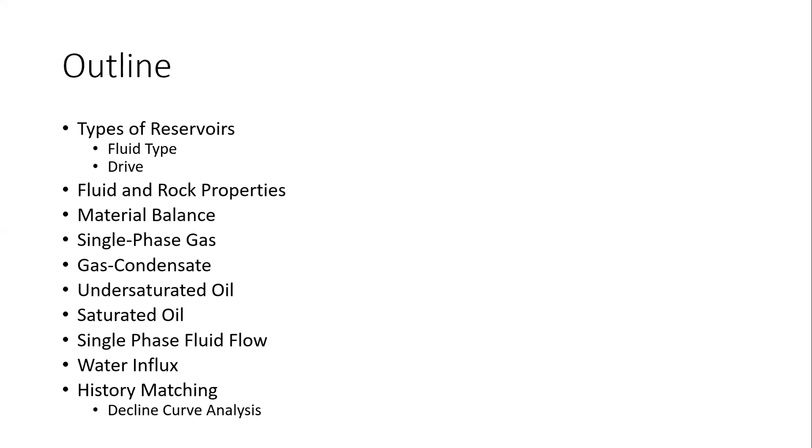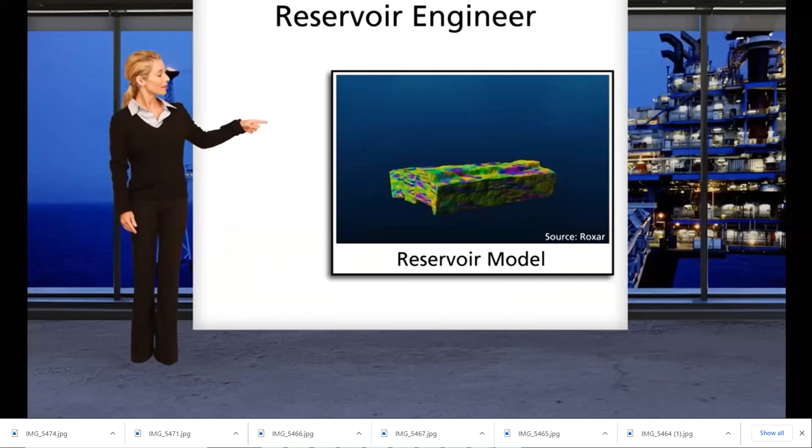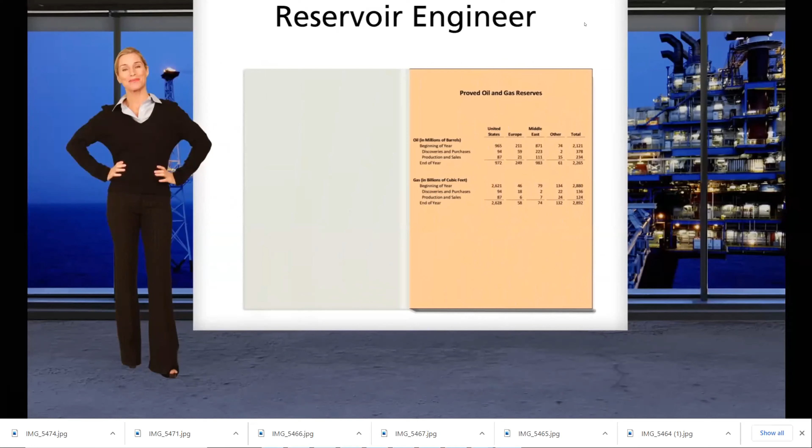These models allow us to perform simulations that help us determine how to manage a reservoir. There are many options involved in reservoir management, so we perform economic evaluations of options to help our company make the best decisions. Finally, we prepare periodic estimates of remaining recoverable reserves. These estimates are relied upon both inside our company and by outside investors, so it's important that we get them right. My job is to design and oversee the drilling... So that's a general introduction of what a reservoir engineer does. Was everyone able to hear that?

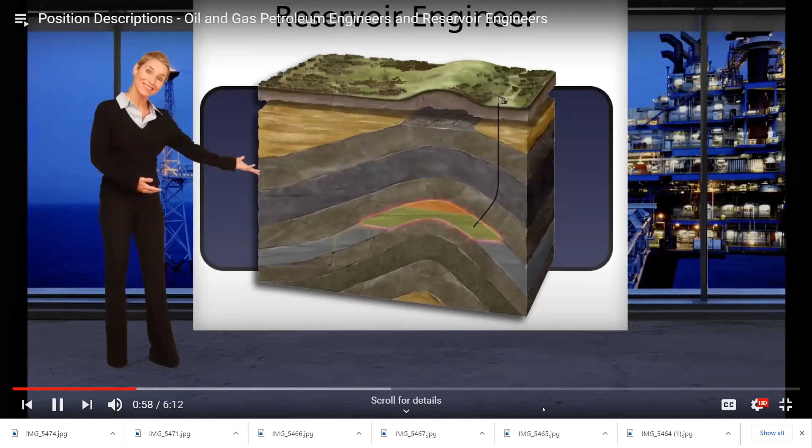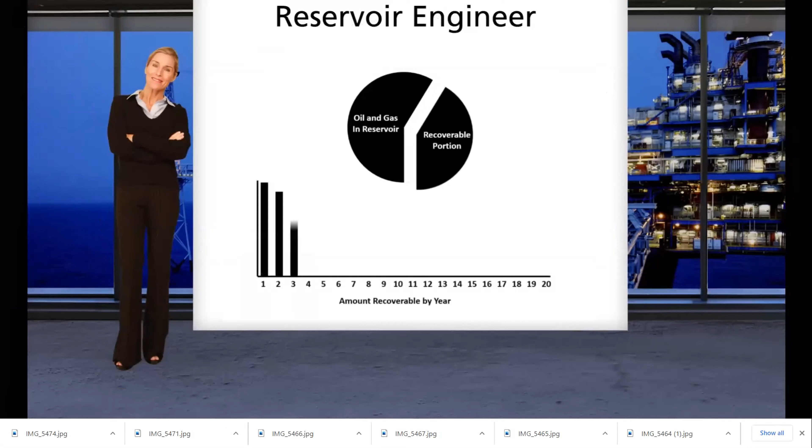A reservoir is underground oil and gas in the rock pores. Reservoir engineers help determine how much oil and gas is in a reservoir, how much can be recovered, and how quickly it can be produced. We also determine what types of wells should be drilled, how many are needed, and where they should be located.

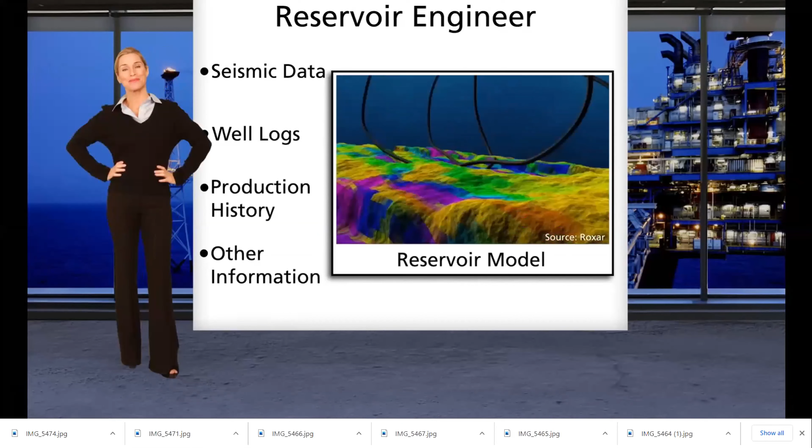We work with reservoir models built using seismic data, well logs, production history, and other information. These models allow us to perform simulations that help us determine how to manage a reservoir. There are many options involved in reservoir management, so we perform economic evaluations to help our company make the best decisions. Finally, we prepare periodic estimates of remaining recoverable reserves. These estimates are relied upon both inside our company and by outside investors, so it's important that we get them right. My job is to design and oversee the drilling of wells, so I'm called a drilling engineer.

Drilling can be extremely complicated. We have to drill holes.

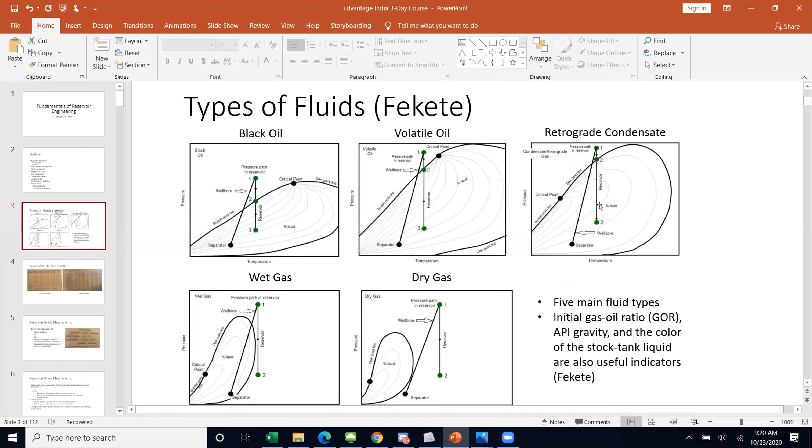First, I'll go over the types of fluids, as I mentioned before in reservoir engineering. There are 5 types of fluids: black oil, volatile oil, retrograde condensate, wet gas, and dry gas. You're able to figure out these different types of fluids from your initial gas oil ratio, API, and the color of the stock tank liquid.

So they're useful indicators. Now for the black oil, I'll go into the detail of what each type of fluid is.

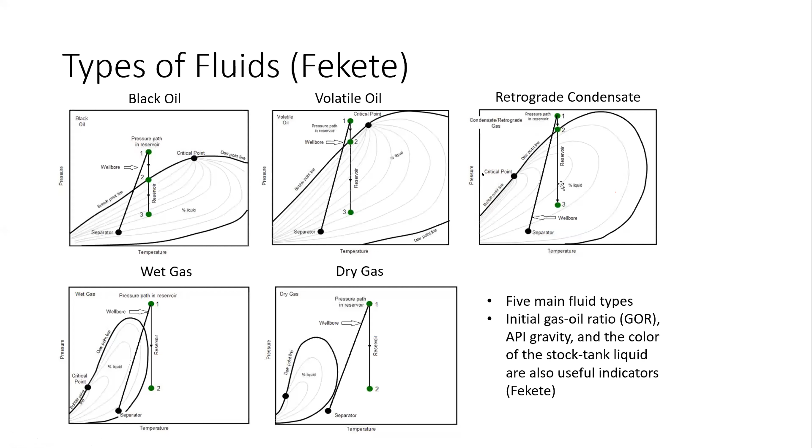Let's see, next slide. Here are a couple more slides that I've gotten from the Craft and Hawkins book, and then the Walsh and Lake book, the reservoir textbooks. I would suggest you get these textbooks to get more information or to give yourself more knowledge in reservoir engineering.

From the Craft and Hawkins textbook... okay, my screen stopped sharing. Let me share my screen again.

If you look at the stock tank gravity, as you go to the lighter fluids, you're getting higher gas oil ratios. And for the API stock tank gravity, you're getting higher API gravities as you reach along the different types of fluids. And then this gives you the different types of colors for each fluid type.

So for a black oil reservoir, you're getting a greenish black. For a volatile reservoir, you're looking at medium orange. A gas condensate reservoir is a light straw color, and for a dry gas reservoir, you're looking at water white. And same goes for wet gas.

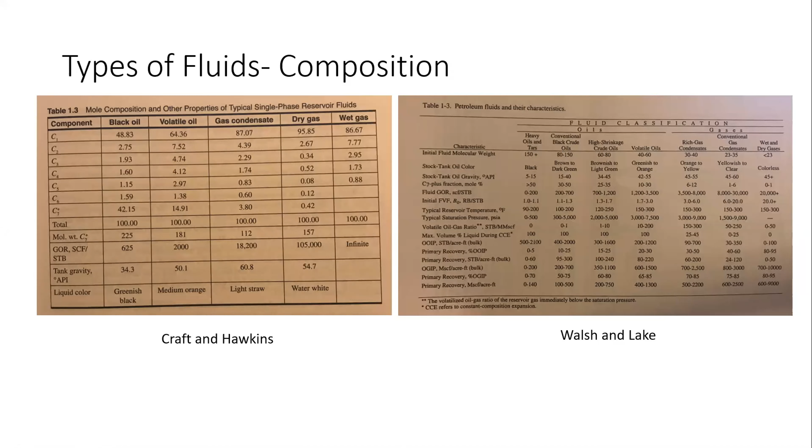Okay, next slide. Now I'll cover the reservoir drive mechanisms as a basic overview in engineering.

To give you the overview of drive mechanisms, you're looking at an energy compression of water and rock, oil and gas. Water is contiguous to and in communication with the reservoir, and gravitational energy causing oil and gas to segregate. This chart gives you an idea of how the drive mechanisms are separated. We're looking at 3 types of drive, such as expansion drive, water drive, and compaction drive.

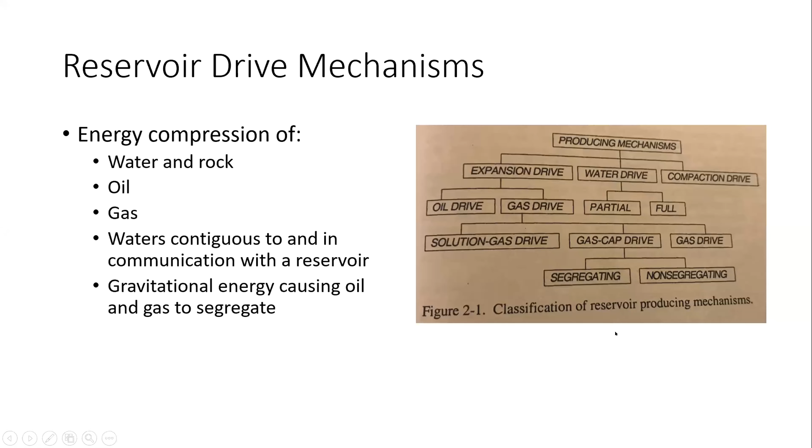Expansion drive is the expansion of reservoir fluid influencing reservoir production. So you have oil expansion and you have gas expansion. I talked about solution gas cap and general gas drive.

Solution gas is dissolved gas that influences reservoir production. You have gas cap drive, which is gas expansion from a gas cap, which influences reservoir production. And you have a general gas drive.

For water drive, you have partial water drive, which means an aquifer has poor water quality and will diminish. And for a full water drive, you have a stronger aquifer, and that influences reservoir production. For compaction drive, you have pore volume contraction that contributes to the reservoir production.

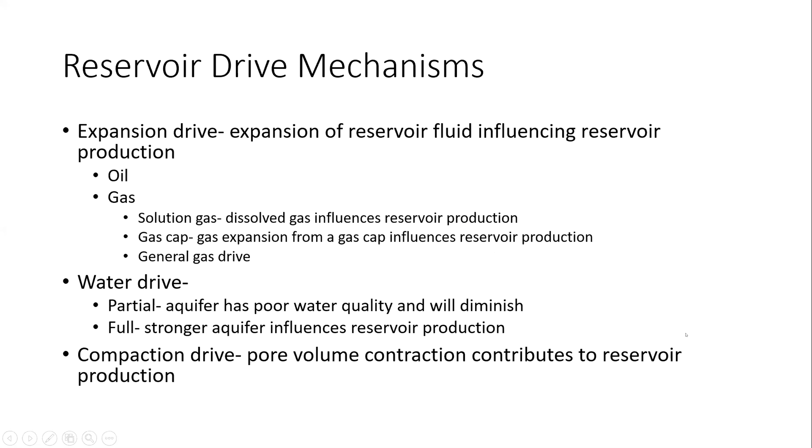For rock properties, I listed some equations down here that could be very important in reservoir engineering. For example, you're looking at porosity. Porosity is, the simple concept of porosity is really your pore volume divided by your bulk volume.

So think about a Swiss cheese cube and think about all the holes in the Swiss cheese. The holes in the Swiss cheese divided by the total volume of the Swiss cheese is going to be your porosity. Then you have isothermal compressibility.

Isothermal means the same temperature, and compressibility is your 1 over volume times the change in volume with respect to pressure. These are your relations of compressibility with respect to porosity. The first equation for your compressibility was developed for sandstones with porosities ranging from 2% to 23%. The second compressibility relation was developed for limestones with porosity ranges of 2% to 33%.

Then you have fluid saturations of oil, water, and gas, which are pretty important for your rock properties. Saturation is pretty much the percentage of fill-up within your porosity that constitutes a certain fluid. So for example, your oil saturation would be the porosity filled by oil divided by the total porosity.

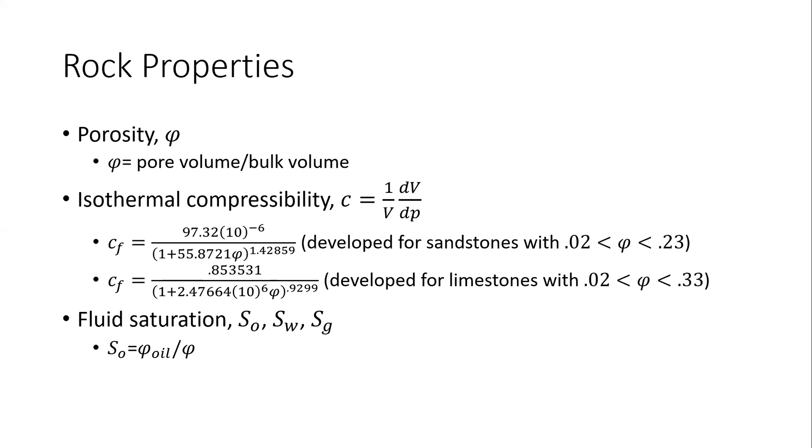For fluid properties of gas, you're looking at the ideal gas law. That is one concept that I would say is pretty important. It's PV equals nRT, where P is your pressure, V is your volume, N is the number of moles, R is a gas constant, and T is your absolute temperature.

You have specific gravity here, which means your density of gas divided by the density of air, which is your molecular weight divided by the molecular weight of air.

Then you have your real gas law, which is PV equals Z nRT, and Z is your compressibility factor for real gases. Z is defined as the actual volume of N moles of gas at a given temperature and pressure, divided by the ideal volume of N moles of gas at that temperature and pressure.

You have your gas formation volume factor, which is Z nRT over P. The formation volume factor is essentially the factor it takes to go from the reservoir to the surface to get your volumes at the surface.

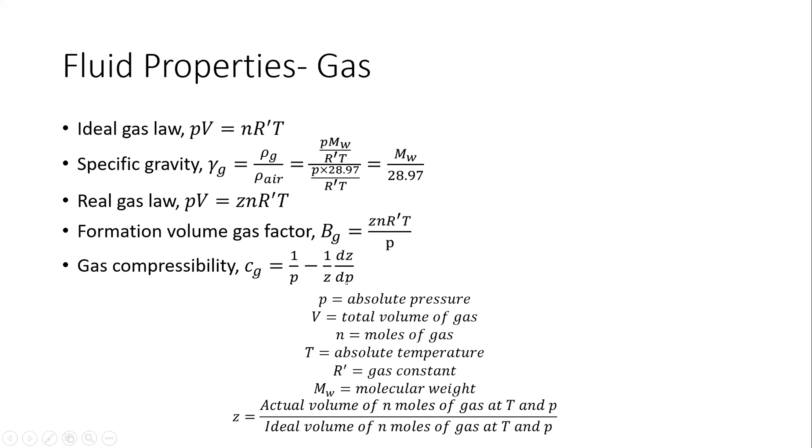And you have your gas compressibility, which is 1 over P minus 1 over your compressibility factor, with respect to the change in compressibility factor with respect to pressure.

So I wanted to give you a sample problem to help you figure out how to determine your Z factor. You're going to learn how to get your pseudo-critical pressures and your pseudo-reduced pressures and pseudo-reduced temperatures with respect to different types of gases.

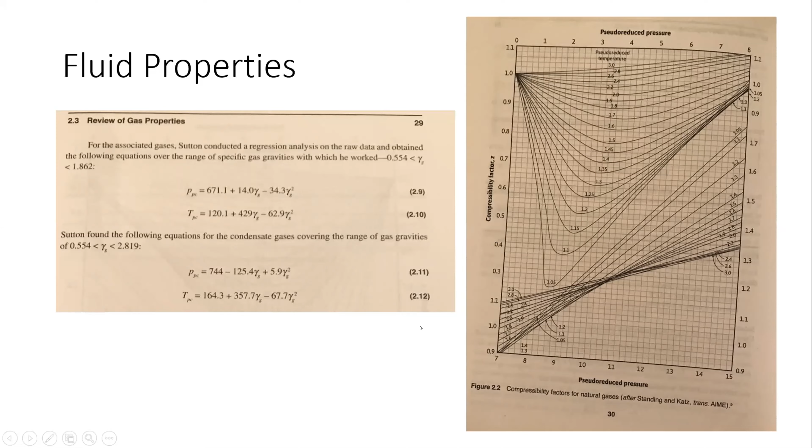Now I'll talk about the fluid properties of oil. You have your solution gas-oil ratio, which describes how much gas is in solution at the reservoir. Then you have your API gravity, which is another relation to the specific gravity of your oil, calculated as 141.5 divided by the specific gravity of oil, minus 131.5.

Then you have your formation volume factor of oil, BO. Above the bubble point pressure, the formation volume factor of oil equals the formation volume factor of oil at the bubble point, times e to the power of the oil compressibility times the difference between the bubble point pressure and the reservoir pressure of interest.

And then for pressure below the bubble point pressure, you have BO equal to the density of the oil at standard conditions, plus a relation that includes your solution gas-oil ratio times the specific gravity of gas at surface conditions, divided by the density of oil at the condition below the bubble point pressure.

You have oil compressibility here. Your compressibility of oil is 1 over volume with respect to the changes in volume from start to finish, and then the pressure differences from start to finish.

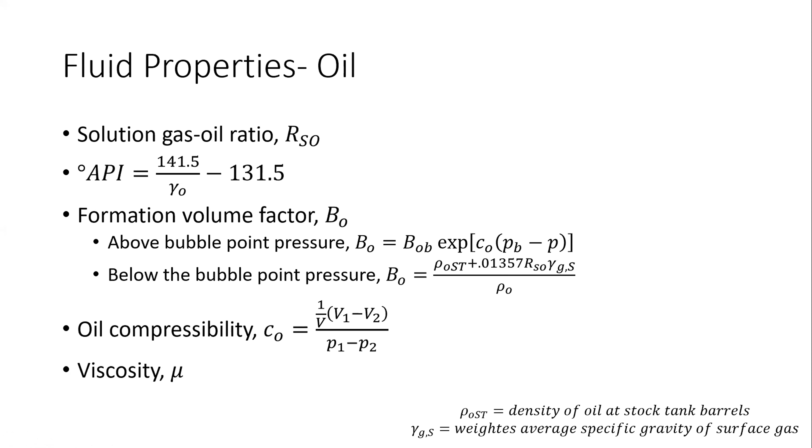Now I'll talk about the fluid properties of water. Water is a pretty simple fluid in how it's treated when it comes to reservoir engineering.

You have your formation volume factor of water, which is typically 1, but it can range from like 1.02 to 1.05. You have your solution gas water ratio, which holds true for predominantly water-producing reservoirs.

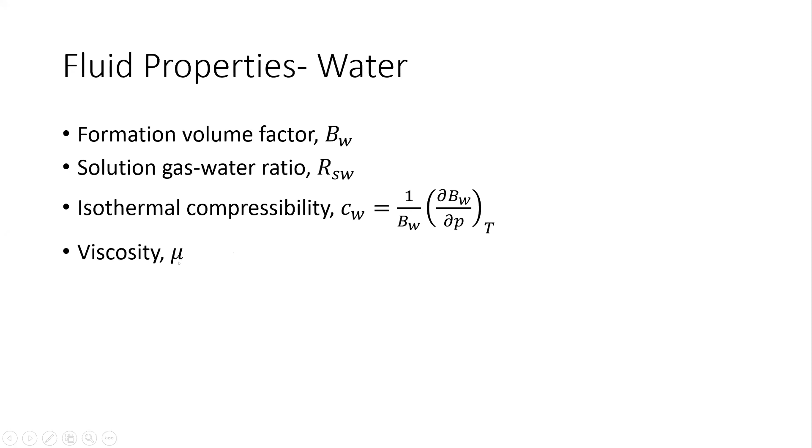Then you have your isothermal compressibility, which is 1 over your formation volume factor of water times the change in your formation volume factor of water with respect to pressure, at the same temperature. And then your viscosity of water, which is typically 1 centipoise.

This is the formulation of your material balance below. This is your oil expansion, and this is your gas expansion term. This is your formation water expansion term, and this is your water influx. And this is equal to your oil production, and this is equal to your water production.

If you're wondering what M is equal to: the total gas in place times your formation volume factor of gas, divided by your total oil in place times your formation volume factor of oil.

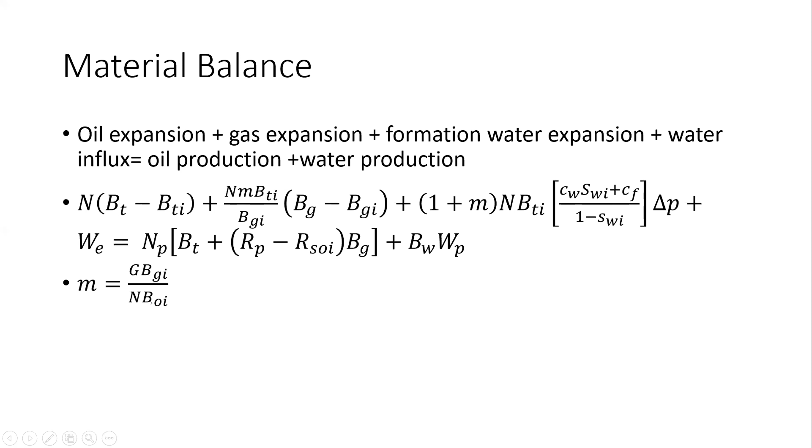Hello? Yes, ma'am, we have a doubt from one of the students, from Muru Vikra Marante, about viscosity measurements, converting mm squared per second to Cp to Pa dot S. Please share the unit conversion.

So are you talking about viscosity? Viscosity measurements, yeah. Yeah, it's Pascal times second, so Pa times S. Okay.

So here are some uses and limitations for material balance. For uses, you're determining the initial hydrocarbon in place, calculating your water influx, and predicting your reservoir pressures.

For limitations, you have precision of values that relies on the data available. As the pressure declines, there is supersaturation, underestimating the average reservoir pressures. It's assumed that PVT gas liberation closely duplicates the same process in the reservoir, well, and separators, and that can actually vary widely, causing error.

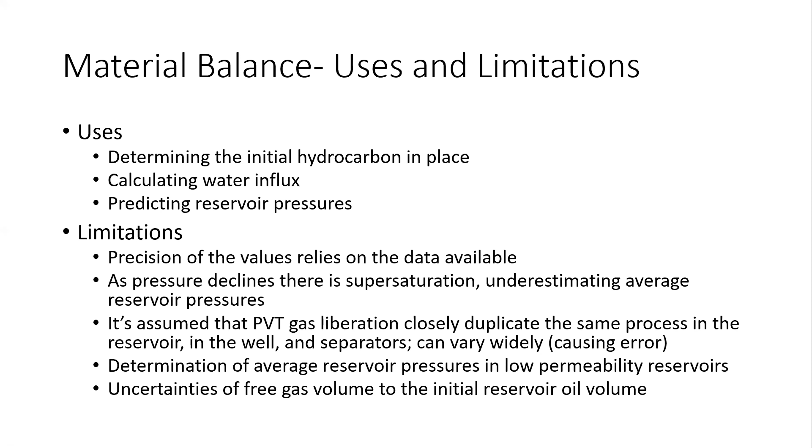The determination of average reservoir pressures in low permeability reservoirs, and uncertainties of free gas volume relative to the initial reservoir oil volume—those are going to be some of the limitations for material balance.

For single-phase gas, you're looking at some important terms such as your original gas in place, which uses acre-feet, or a conversion of acres to feet squared, times your porosity, times 1 minus your water saturation, divided by your formation volume factor of gas.

For the gas material balance, you're looking at your gas expansion plus your water influx is equal to your gas production plus your water production. Assuming no water encroachment or water production, the material balance can be simplified to the gas expansion equal to the gas produced.

This can also be rearranged and reduced to your P over Z, which is equal to your initial pressure divided by your initial gas compressibility factor, divided by your gas in place, times your gas produced, plus your initial pressure divided by your initial compressibility factor.

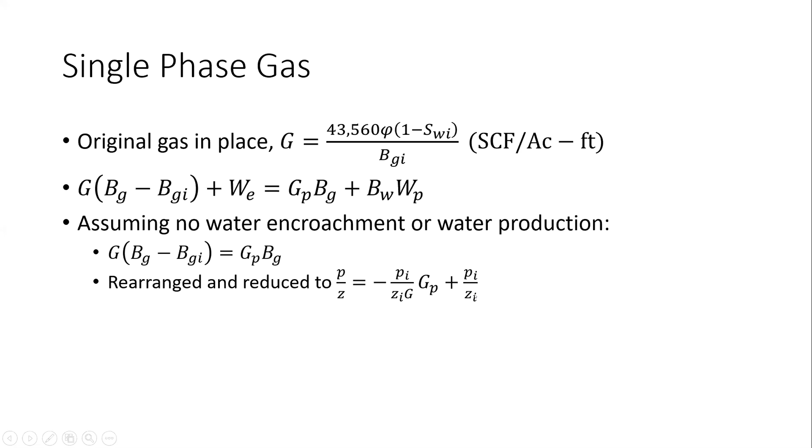Here's a chart that gives you your P over Z plot versus cumulative production. Reaching the end of the plot to get your x-intercept represents your initial gas in place.

If you have a water drive, you're going to be curving upward. If you have some water encroachment when it comes to your gas production, it can make it hard to predict your original gas in place, so material balance is very important there.

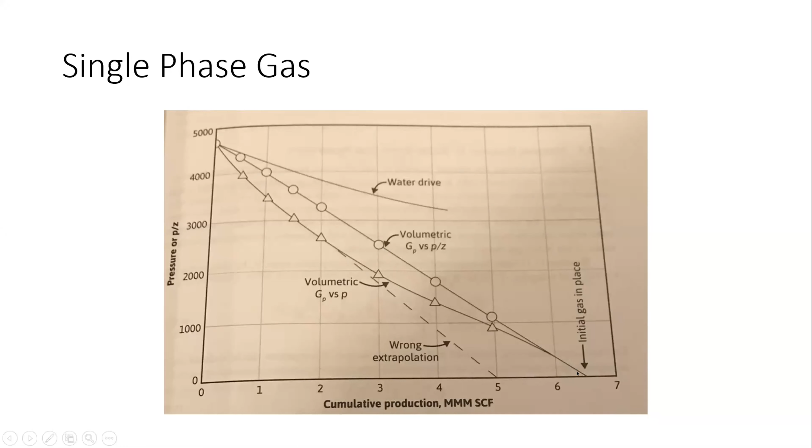And then you have your volumetric gas produced versus your P over Z. You could have some water encroachment to where your initial gas in place could be a little bit higher in that curve.

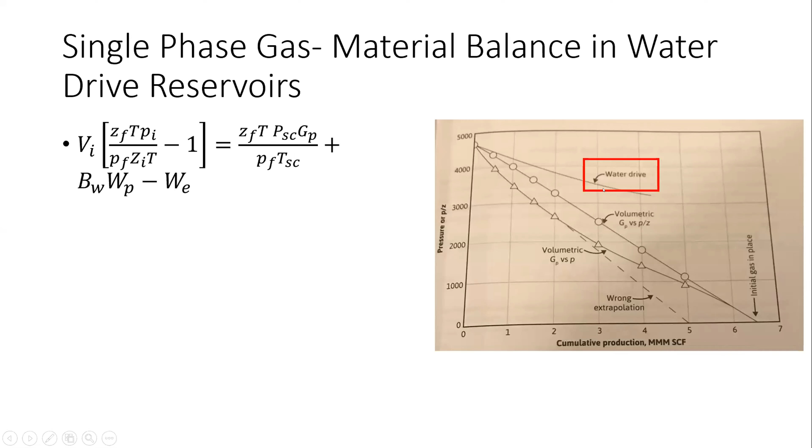Then you have your water, plus your water produced minus your water influx. And it's referring to this curve on this plot over here.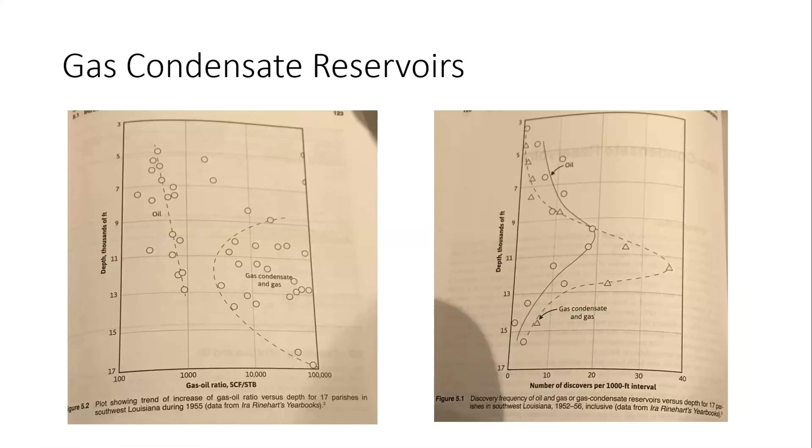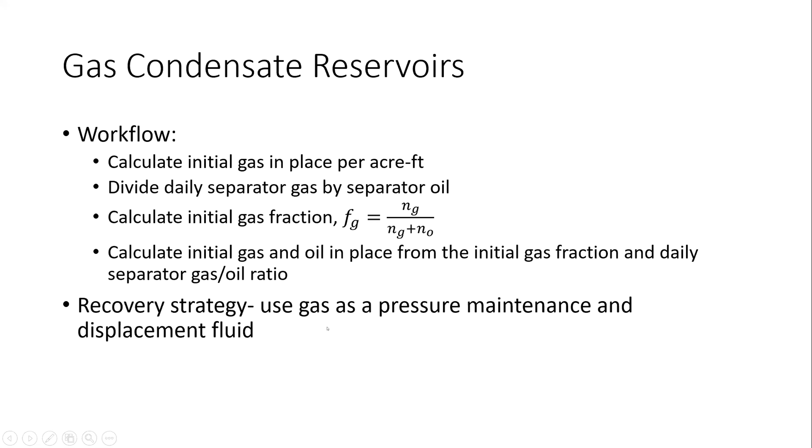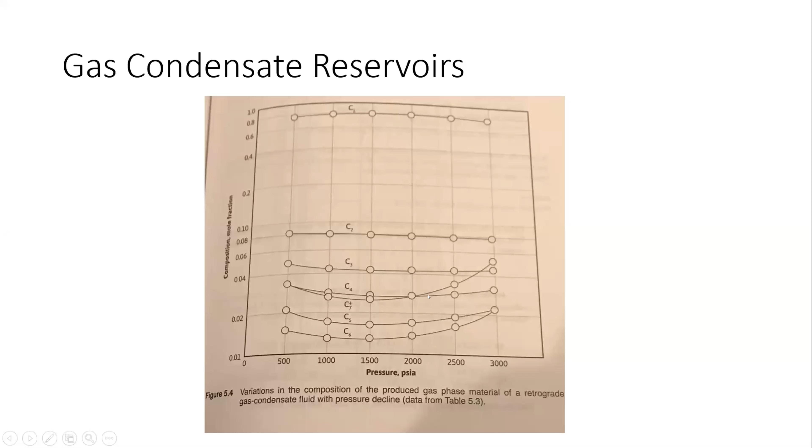Here's an overview of your gas condensate reservoir showing different elements at different pressures, with different values and different compositions at different pressures, which makes your gas condensate reservoir very sensitive to pressure. The heavier elements move a little bit upward as the pressure goes higher, while your lighter elements, C1s, C2s, and C3s — methane, ethane, and propane — stay relatively the same. But when you reach butane, pentane, hexane, and heptane plus, you see some curvature as pressure changes, making the heavier elements more sensitive.

So here are some best practices for volumetrics in gas condensate reservoirs. You duplicate reservoir depletion by lab studies on a representative sample of an initial single-phase reservoir fluid. You hold the sample at high pressure in the cell, at reservoir pressure and initial temperature. During depletion, the cell volume is held constant to duplicate a volumetric reservoir, and therefore you remove the gas phase hydrocarbon from the cell.

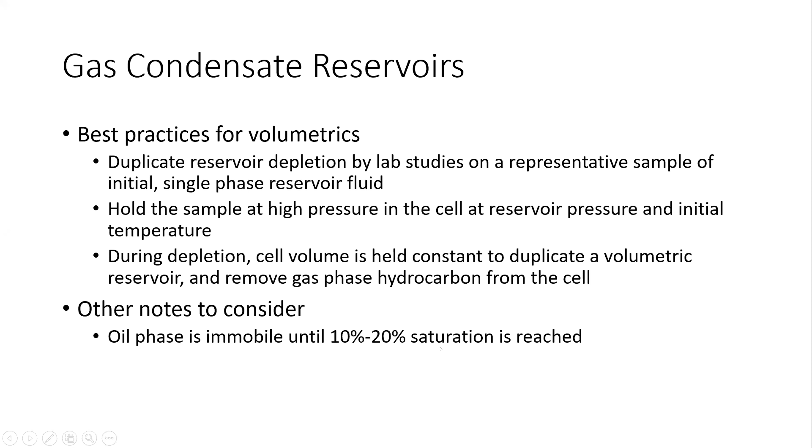Other notes to consider: the oil phase is immobile until 10 to 20% saturation is reached, so it's at higher pressures that you probably reach higher oil saturations.

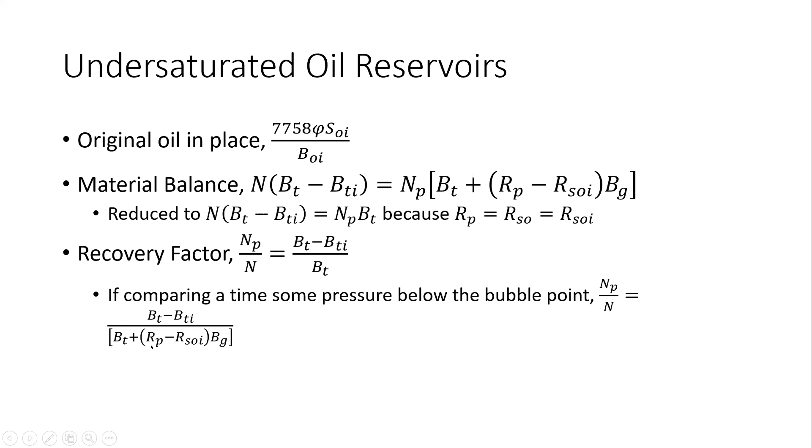If you're comparing at some time below the bubble point, this is the relation for the recovery factor. You have to include the solution gas oil ratio at a certain pressure because you have some pressure below the bubble point.

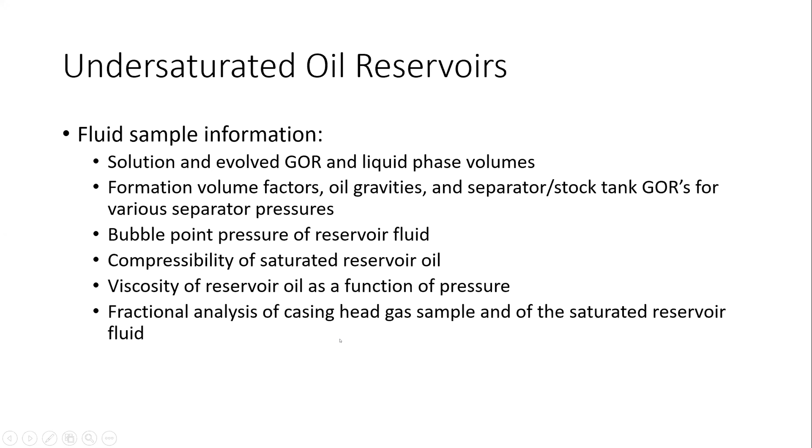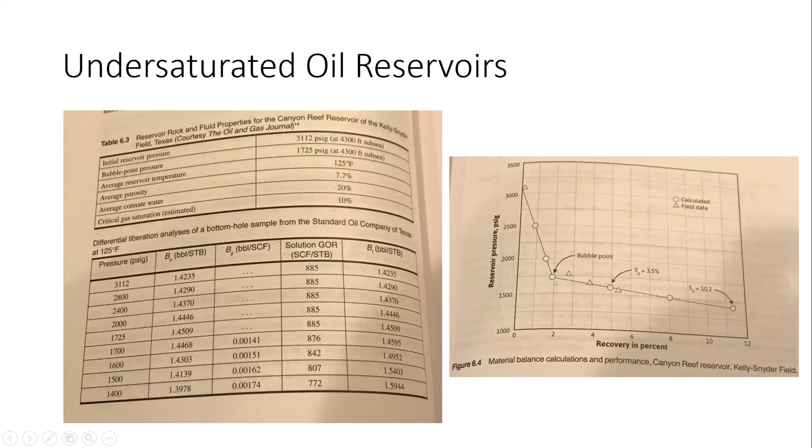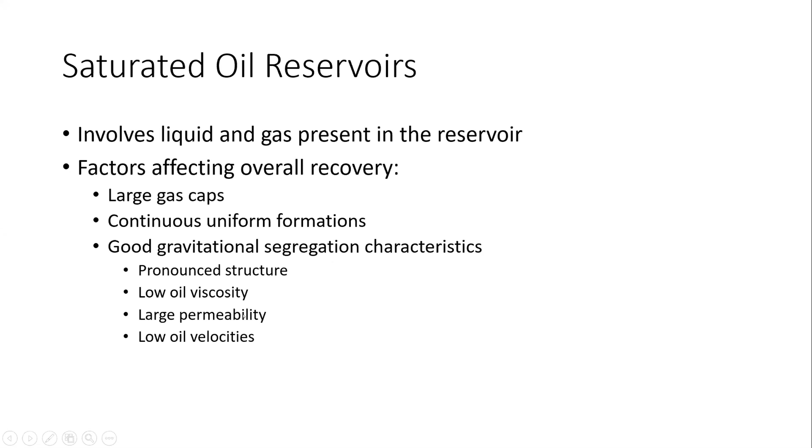In saturated oil reservoirs, that includes liquid and gas present in the reservoir. Factors affecting overall recovery are large gas caps, continuous uniform formations, and good gravitational segregation characteristics such as pronounced structure, low oil viscosity, large permeability, and low oil velocities.

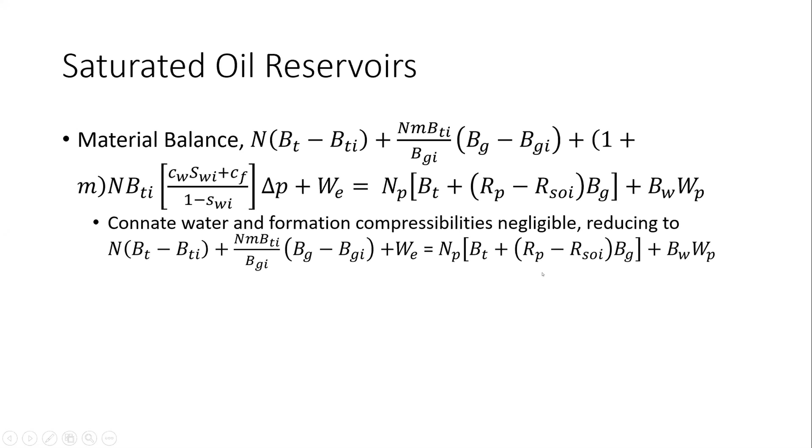However, connate water and formation compressibilities are negligible when it comes to saturated reservoirs. So that's reducing your equation to just your gas expansion plus your oil expansion plus your water influx, equaling your oil and gas production plus your water production.

I wanted to give you some clarification of terms. I did mention differential liberation before, so here are some definitions. Flash versus differential liberation, they're critical to understand, especially for fluids with a large percentage of intermediate hydrocarbons. That's included for saturated reservoirs, such as volatile oil reservoirs. Intermediate hydrocarbons represent your C3, C4, and C5, your propane, butane, and pentane.

Flash liberation means that all the gas evolved during a reduction in pressure remains in contact and equilibrium with the liquid phase from which it's liberated. Differential means the gas evolved during a pressure reduction is removed from the liquid as rapidly as it's liberated.

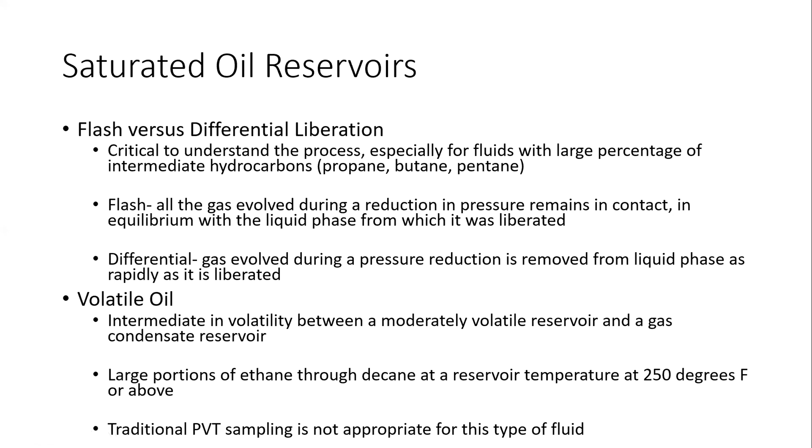A little bit of information on volatile oil. It's intermediate in volatility between a moderately volatile reservoir and a gas condensate reservoir, with large portions of ethane through decane at a reservoir temperature of 250 degrees Fahrenheit or above. Traditional PVT sampling is not appropriate for this type of fluid because it remains a fluid at reservoir conditions, but once you reach the wellbore, you see more gas coming out of solution.

At a single phase flow, I'll go over this. There's a lot of information for this actually. I'll now go over the single phase flow portion of the presentation.

Here's some definitions when I talk about steady state, pseudo-steady state, or unsteady state. For steady state flow, that's a condition under which pressure at any point in the reservoir remains constant over time. For pseudo-steady state flow, it's boundary-dominated flow, which occurs when the drainage radius reaches the reservoir boundaries once the transient period ends. For unsteady state flow or transient flow, the flow parameters, i.e. velocity and pressure, are dependent not only on position, but also on time.

An incompressible fluid is typically water. When we talk about slightly compressible fluid, we're typically talking about oil. And then for compressible fluids, when I'm going to talk about the equations, they're typically gas.

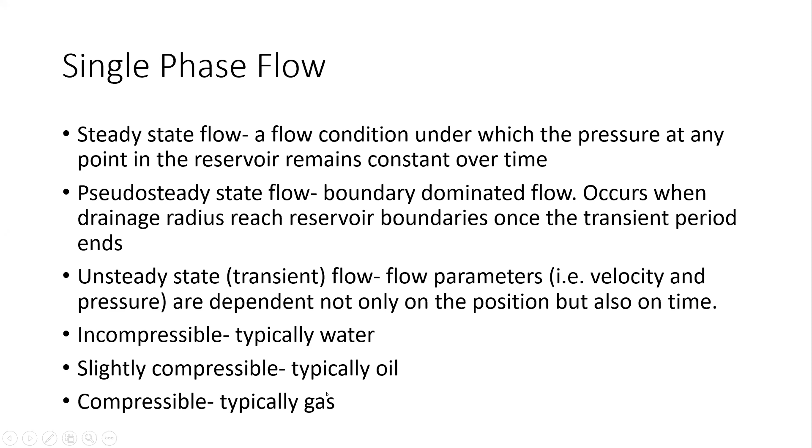For a single phase flow, I'll go over Darcy's law. Darcy's law is pretty much the fundamentals when it comes to a single phase fluid flow in reservoir engineering.

For Darcy's law, you're looking at the conversion from SI units to oil field units with this term, times the permeability times your cross-sectional area times your pressure difference, all divided by your oil formation volume factor times the viscosity and times the length at which you are flowing your fluid. So this is your L, that one on the chart on the right.

Darcy's law for gas or compressible fluids, so in steady state is going to be this relation right here. Your M is taking into account pseudo pressures, because you have differences in your volumes when it comes to gas at different pressures. So this is the integral of your reservoir pressure to your pressure of interest, with respect to your pressure of interest over your viscosity times your compressibility factor at your reservoir pressure and at the pressure of interest.

Assumptions for Darcy's law are that you have laminar flow, steady state, homogeneous, and your total cross-sectional area is considered. So that's the chart or picture on the right, where you have your total cross-sectional area, your section of interest, your P1, your pressure of interest at one area, and your P2, your pressure of interest at your other area.

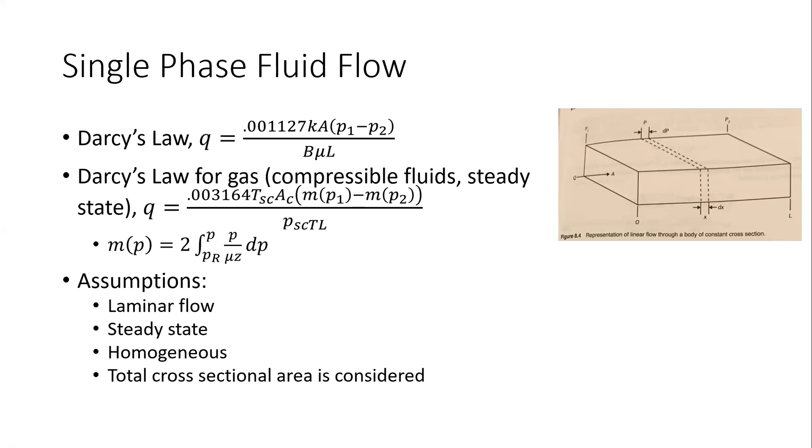Another concept for single phase flow is permeability averaging. Permeability averaging laterally is in series, so that's your summation of your lengths divided by your summation of your lengths divided by your permeability. Permeability averaging vertically is your permeability times your height or thickness summation divided by your total thickness. Then your permeability flow through your capillaries and fractures has the relation over here.

For radial flow for incompressible fluids, you have this relation, which is your conversion from SI units to oil field units, times your external pressure difference between your external pressure and your well bore pressure, times your permeability and your thickness, divided by your viscosity, your oil formation volume factor, with the natural log of your external radius divided by your well bore radius.

Then for radial flow for slightly compressible fluids, you have the same relation as before, and then you only take into account the compressibility. I do want to point out that this W represents your width in fractures, and your AC represents your contacted area.

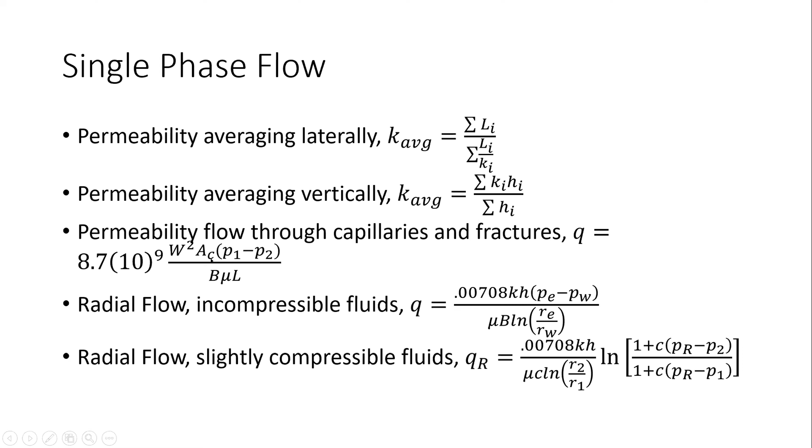For radial flow and compressible fluids, so for your gas, you're looking into your pseudo pressures again, and then your permeability times your height. And then for your permeability average,

Radially, I've heard that I'm echoing a lot.

For your permeability average radially, you're looking at your perm average times your Ka times your Ke, so you have your Ka times your Ke at different thicknesses, times your natural log of your external radius divided by your well bore radius. This is your external radius and this is your well bore radius, if you look at the bottom right. Then you have your Ka, which is here, times your logarithm of your external radius divided by your well bore radius, plus your Ke, so your Ke is here, times your logarithm of your RA radius divided by your RW radius.

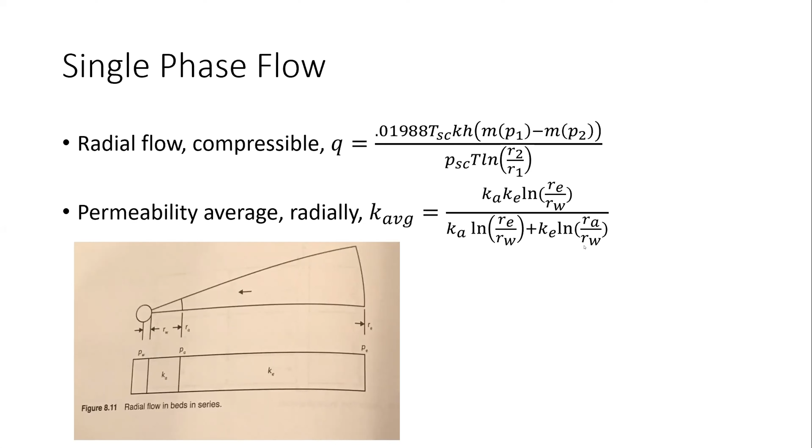For single phase flow, you're looking at the mass entering the volume element during the time. Now I'll talk more about the diffusivity equation, where your mass entering the volume element during a certain time delta t, minus your mass leaving the volume element during interval delta t, is equal to the change in mass of the volume element during the interval delta t.

This is a breakdown of your diffusivity equation, where your permeability divided by your viscosity, times your density and your radius with respect to the change of your pressure, divided with respect to the change in your radius, that's equal to the density times your porosity times the compressibility of your fluid times the change in

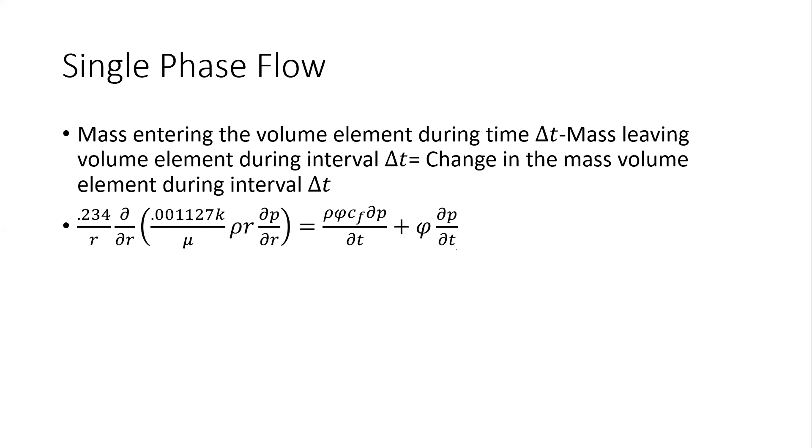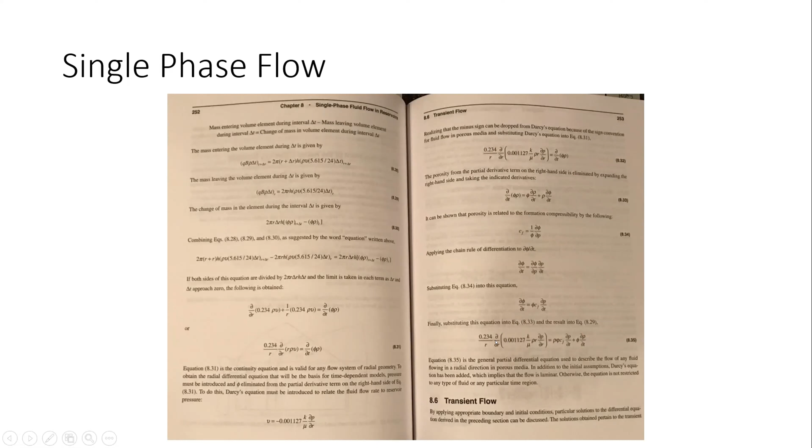For radial flow, slightly compressible fluids, for transient flow, you have your initial reservoir pressure minus this relation here for your fluid flow, your viscosity, and your formation volume factor divided by your KH. That's equal to the exponential integral, with your porosity, your viscosity, your total compressibility, and your R squared divided by your permeability times your time.

Radial flow for your transient, you're taking into account your pseudo pressures here again. For slightly compressible fluids, for pseudo steady state flow, you're taking into account your shape factors here - that's what CA is equal to, and then your contacted area. And then for radial flow, for compressible and pseudo steady state flows, you're still taking into account your pseudo pressures here, and then your temperature at standard conditions and your pressure at standard conditions too.

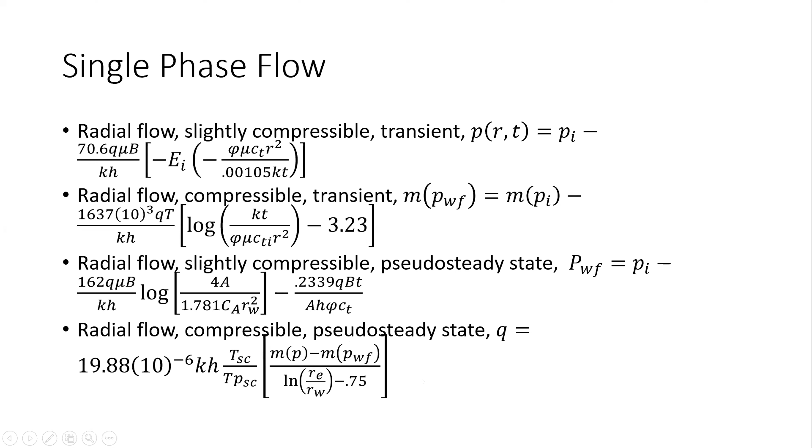I also wanted to talk about the productivity index, which is your Q divided by your P minus PWF, so your reservoir pressure minus your wellbore pressure. Here's your superposition, or your total pressure drop, which is going to be your different pressure drops using this equation here.

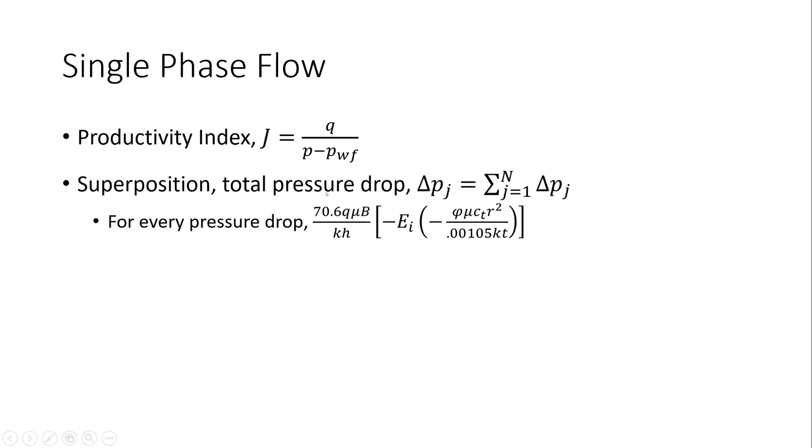For water influx, it's the rate of oil volumetric voidage plus the rate of free gas volumetric voidage plus the rate of water volumetric voidage, and that is your relation that's shown over here. So that is your oil volumetric voidage, gas volumetric voidage (free gas), and then your rate of water volumetric voidage.

For unsteady state models, you're looking at the Edgewater model, which is where water influx enters the formation from the flanks with negligible vertical direction, and this is the relation that you're looking at here. Your bottom drive has significant vertical flow, which introduces a Z term over here - it's a similar setup as this one, but you're introducing a Z term here. And this is what your Z is equal to.

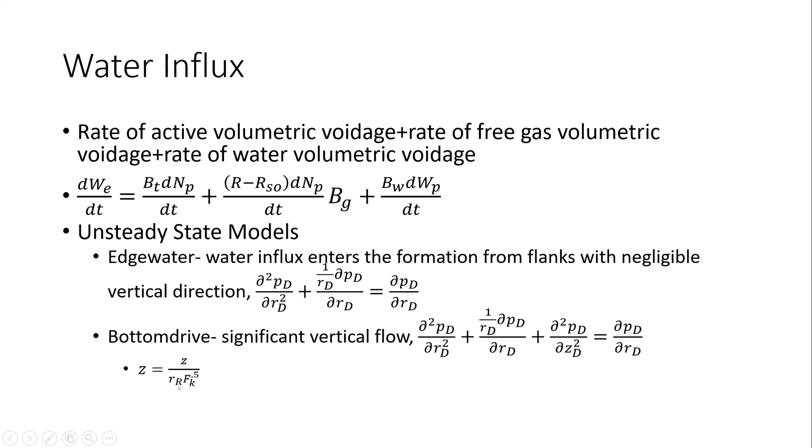Now the last part I'll talk about is your decline curve analysis. Decline curve analysis is an empirical way to fit your production data, and that's very important for reservoir engineers. The general equation for decline curve analysis is 1 over your rate with respect to your change in rate over time, and that is equal to your curvature factor times your rate to the power of your decline.

Here's the equation for your exponential decline with your B factor equal to 0, and that's your rate equal to your initial rate times the exponent minus e to the minus your time times your initial decline. For cumulative production, you're looking at your Q1 minus Q2 divided by your initial decline.

For your hyperbolic decline, you're looking at a curvature or B factor between 0 and 1, and this is your relation for hyperbolic decline. For cumulative production, you have this relation for your hyperbolic decline, if you can see my cursor.

For harmonic decline, your B is equal to 1, which simplifies the hyperbolic equation to this equation, where it's your Q naught, your initial rate, divided by 1 plus D initial decline times time. And this is what your cumulative production looks like if you were to integrate this equation with respect to time.

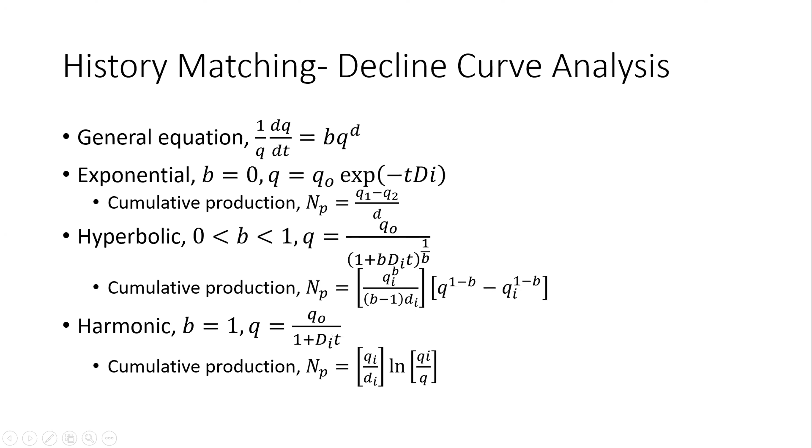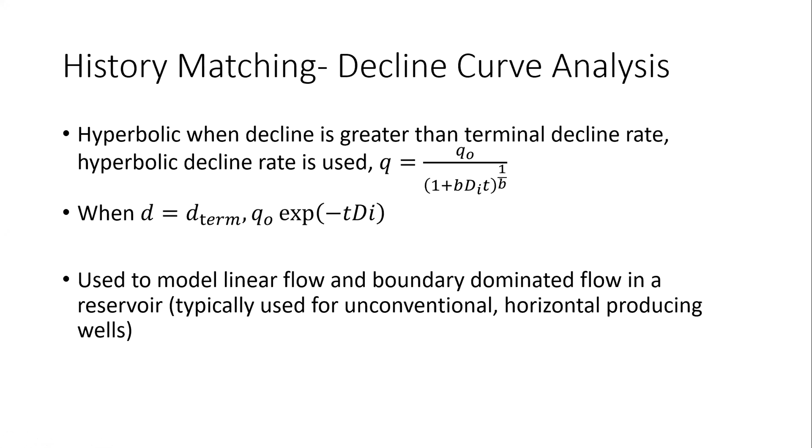I'll now talk about the modified hyperbolic decline. You use hyperbolic decline when your decline rate is greater than the terminal decline rate. When your D equals your terminal decline, you switch to exponential. This is why you use modified hyperbolic decline, which models linear flow and boundary dominated flow in a reservoir, typically used for unconventional horizontal producing wells in decline curve analysis. You don't strictly use hyperbolic or strictly exponential alone; you use a combination of both by agreeing on what your terminal decline will be.

To give you some pointers on the type of decline we're talking about, some DCA software refers to nominal decline and some refers to effective decline. Nominal decline is the slope tangent to the data point, while effective decline is the slope not tangent to the data point, more like a secant when you look at it.

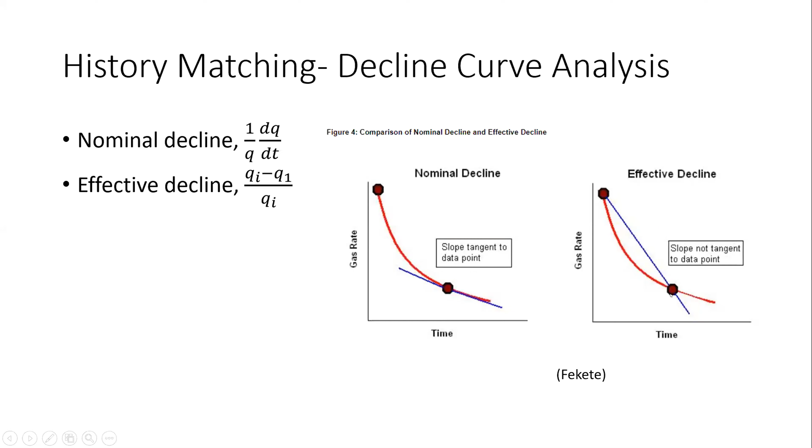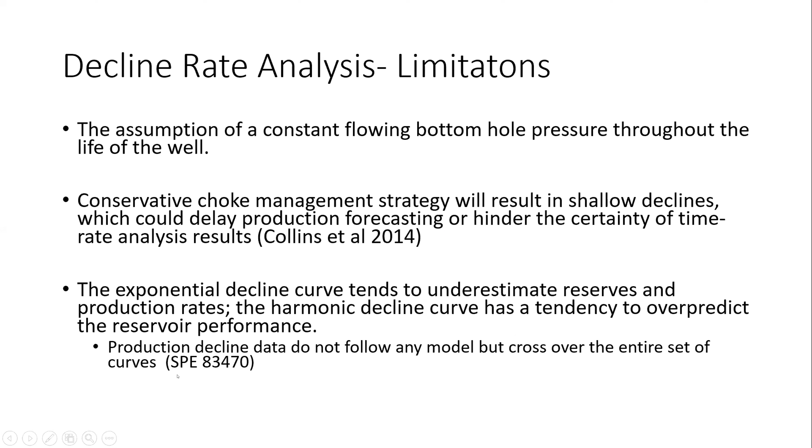Some limitations for decline curve analysis: the assumption of a constant flowing bottom hole pressure throughout the life of the well. A conservative choke management strategy will result in shallow declines, which could delay production forecasting or hinder the certainty of time-rate analysis results. That comes from a Texas A&M paper from 2014. The exponential decline curve tends to underestimate reserves and production rates, while the harmonic decline curve tends to overpredict reservoir performance. So exponential can underestimate and harmonic can overestimate. Production decline doesn't always follow any one model, and curves could cross over an entire set of curves in some cases. This comes from a Stanford University study from 2003.

That concludes my portion of the workshop covering the fundamentals of reservoir engineering. I know I went a little over time, but I'm open for a few questions.

Does anyone have any questions for me?

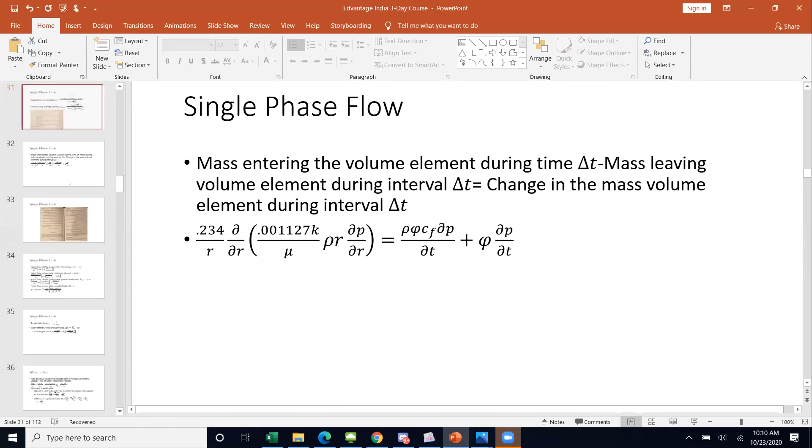You're getting more gas coming out of solution. That's one reason. Let's see. You're getting more gas coming out of solution, that would definitely be one, and according to the field, yeah, you're getting more gas coming out of solution, so you just have a higher solution gas drive. I'd say that's the reason why.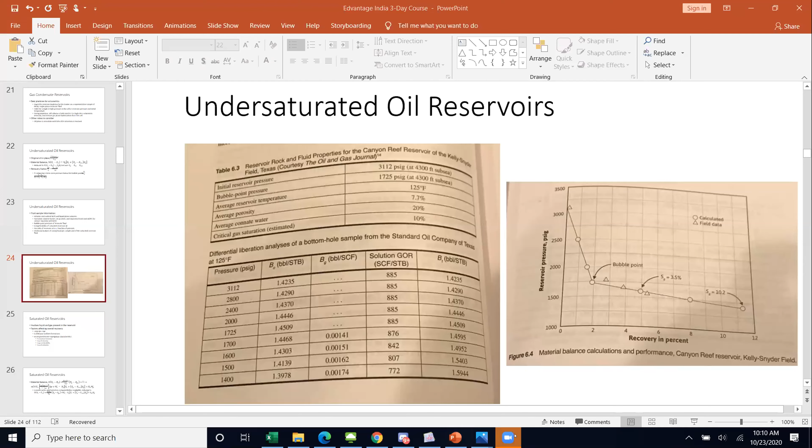Any other questions?

When to use flash vaporization and differential vaporization? The conditions of applicability, how do they vary with time during these tests? It's better to take these tests during the early time of the production life, because if you take them during the later time of the production life for both tests, chances are you'll already get two phases for your well, so you wouldn't get an accurate representation for your flash vaporization and differential liberation tests.

In an undersaturated reservoir, is it preferable to fall below the bubble point? Okay, there's a lot of questions here, let me go one by one.

When to use, what are the conditions of applicability with oil formation volume in solutions? The applicability is to use it during the earlier time of the well life. Use differential liberation if you want to remove gas, and flash vaporization if you don't want to remove any gas that's coming out of the reservoir. But you could use either one. I would say that you have to take these tests during the early life of the well.

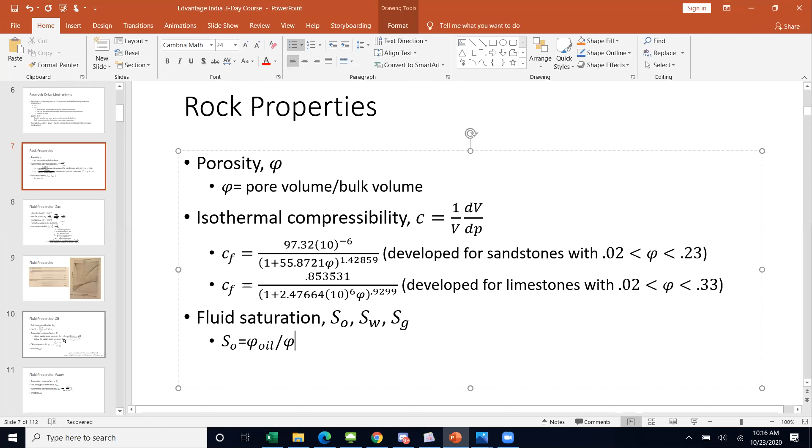I have one more in the chat box. Should a reservoir engineer be well versed in geology, or is it the work of a geologist to make the reservoir model with all the upscaling done? A reservoir engineer should be well versed in geology. You need to know some background in geology to understand where exactly to land your wells and to understand the heterogeneity. Having a basic background in geology will make you a better reservoir engineer.

And is the work of a geologist to make the reservoir model with all the upscaling done? That is the work of a geologist to make the reservoir model, but the reservoir engineer and the geologist must communicate with each other to create the accurate model.